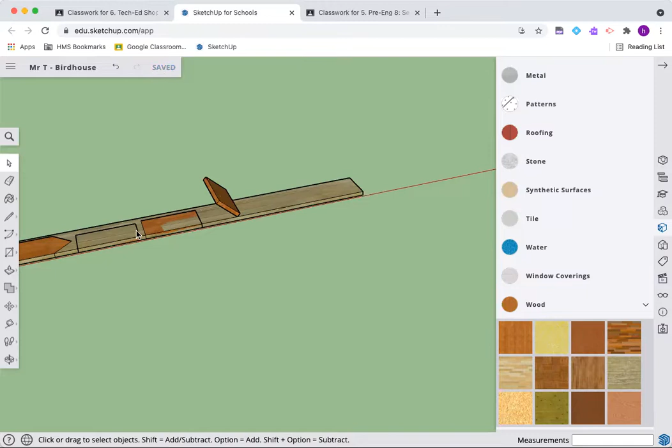Now you have probably noticed that these rotated rectangles are fairly tricky to get in the proper place. So one strategy you can use is get it roughly where it belongs, and draw a line along one of the axes and use that to get everything squared up.

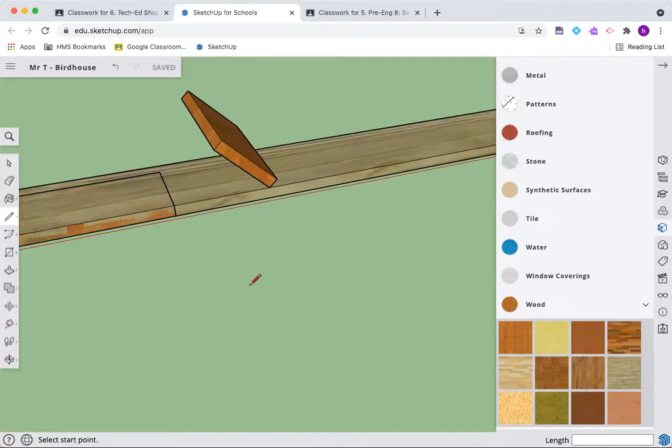Let's see what happens when I go to move this over, and try to rotate this. If I grab it right at that corner, this is the blue axis. We want to get it onto the green axis.

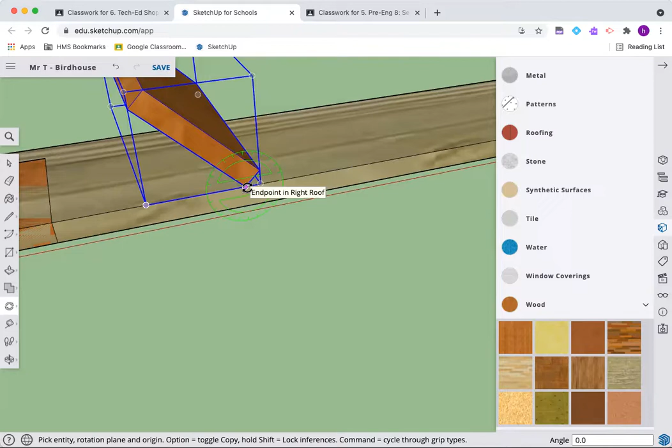Hit left arrow on your keyboard, pick our pivot point, pick where we're going to grab it, and we're going to pull it down and try to lock it on the top there. Now we have it roughly where we want it. Let's grab this corner and pull it straight down.

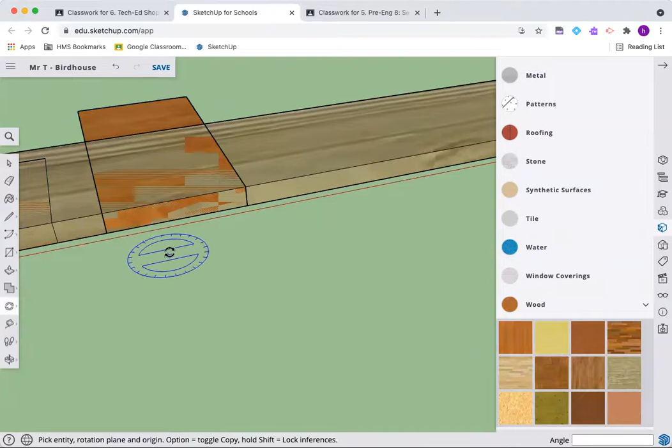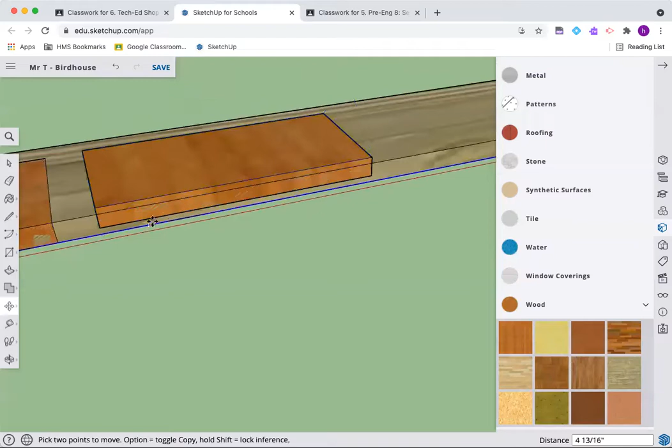It's going to take a little bit of rotating here. Let's grab it at this corner, that corner, and rotate it around to get it locked. And because we want to not waste material in this design, let's Control Z and move it back.

There we go. All right, we have all our pieces on our board. We know it's going to fit. Oh, and there's our little dowel piece that we made, and we'll move that here in a second.

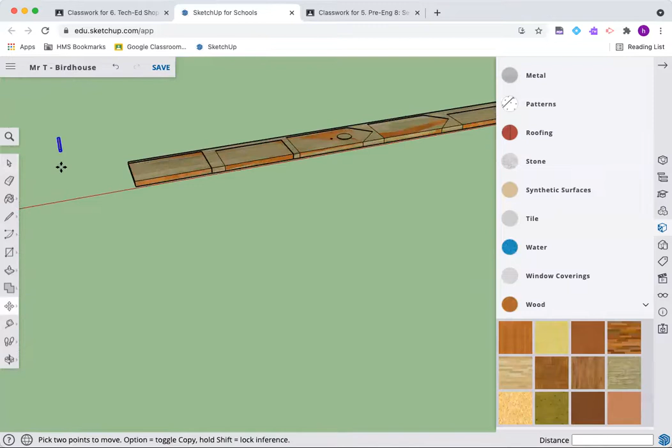All right, let's select all these pieces. If you hold Shift, you'll be able to pick them all. Make sure you can see them all at once.

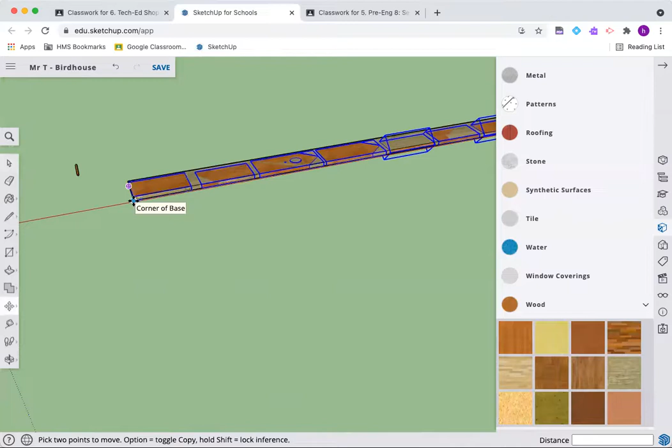There we go. We'll zoom out over there, zoom in here, and we're going to move them all off the board. We got them all lined up now. Make sure it's on the green axis. If it's not, hit the left arrow to make sure it moves so it is on the green axis. Let's rotate up.

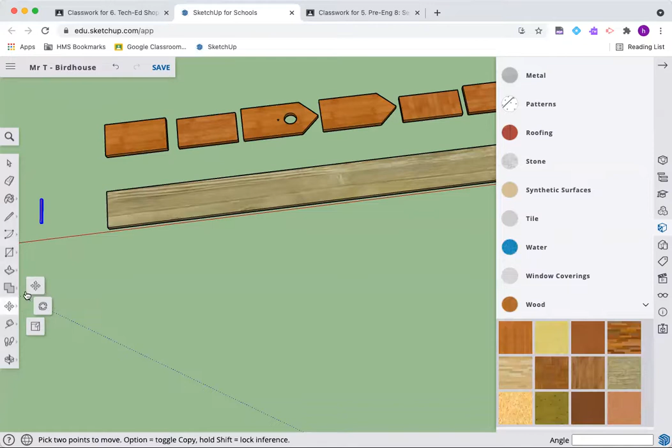Let's grab our select tool, our cursor, and let's move this guy. Come on. Sure, let's move him there and get him down next to the rest of our pieces.

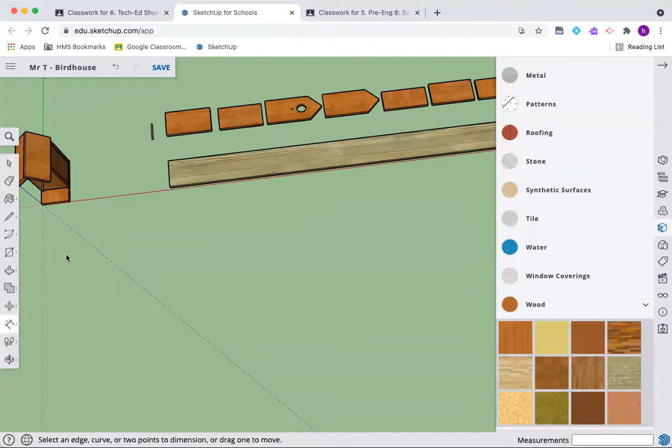The last thing we're going to do with this is we're going to put some dimensions on it, and we're also going to label it. Go over to this measuring tape. The second one down will be dimensions, and we're going to put on all the important dimensions. Click here.

So that if and when we go to build this, line up each of your dimensions, we can know how far everything is in order to build this.

Now, here's a tricky one. We're going to want some kind of a reference line here so that we can get an accurate total measurement off of this. This is 9 1/4 to here. Here to here is 1 foot. So let's get both those dimensions on so that the person who's building this knows.

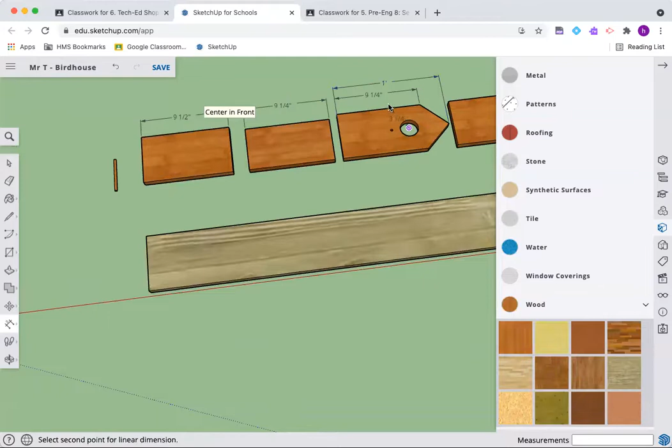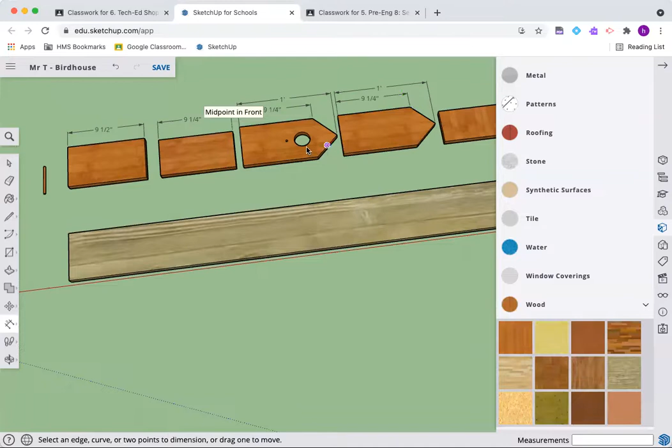And we need to do the same thing with this side, as long as they know this, as long as they know this. There we go, as well as the width of the boards. Of course, they're going to be able to understand and know how to build it.

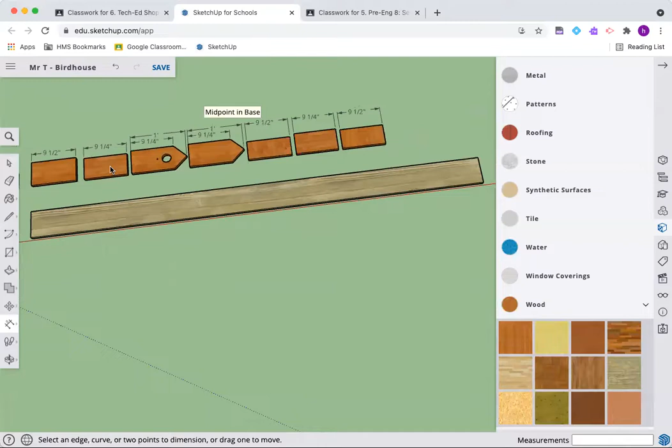Let's put some dimensions on this, line it up with the rest on the green axis. There we go. How about some widths?

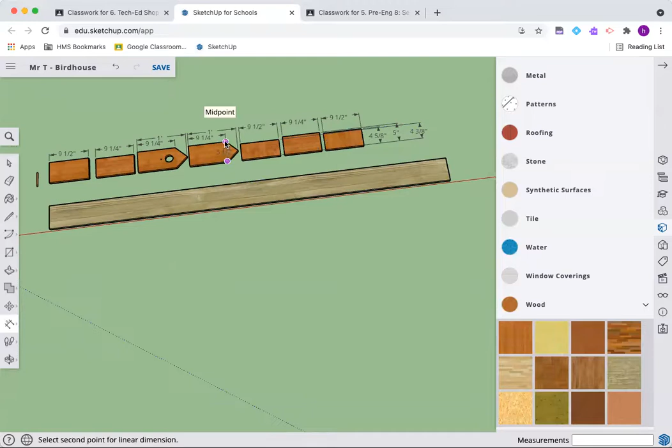4 5/8. This is 5. 4 3/8 and a half.

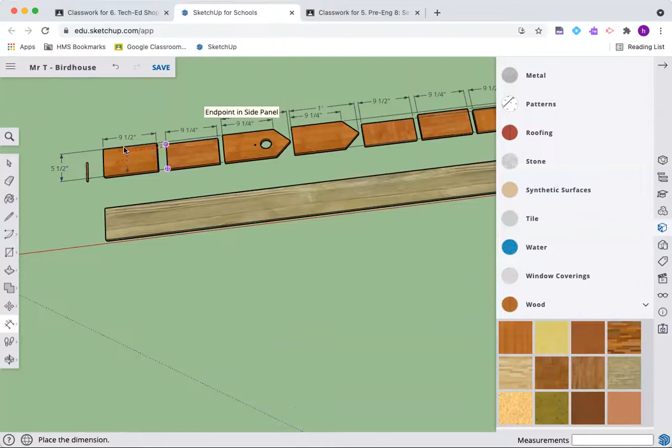For the sake of attempting to make this somewhat not messy, which it kind of is, there we go. Let's get those going the other way. All right, there we go. We have all the dimensions that somebody would need.

And let's click save.

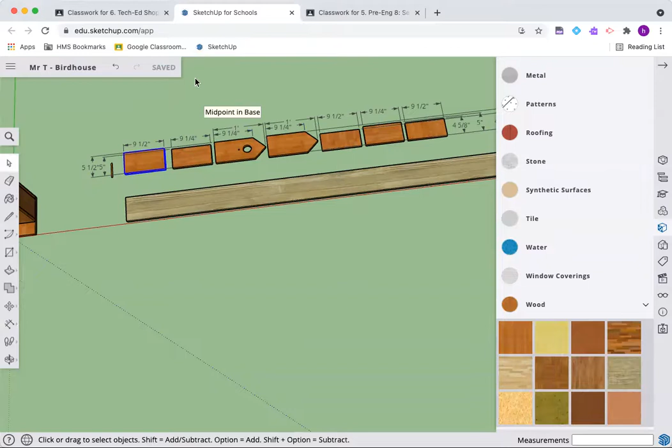And there we go, that's the end of our project. Once you have all those dimensions on there next to the board, here's our finished birdhouse. This is a project that you can save, and if you would like, you can save it for a future woodshop class or get a chance to build it in this class if you had time.